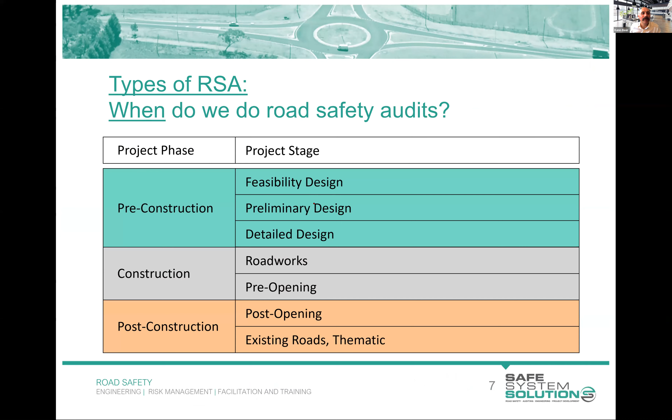Okay, so those were the sort of types of audits you can do. And in every one of those audits, regardless of whether it's a feasibility, a post-opening, or existing conditions audit, you follow the same 8 steps. The process is the same - it's just the information you're getting, the type, and the amount of detail that's different. So this session, I want to define those 8 steps of a road safety audit. One of the things which has been quite good is that internationally there's general consistency with these 8 steps.

And I'll point you to some further information. So, a road safety audit is a fairly straightforward process, 8 steps. It does take time, it adds value to the project, and it really should be an integral part of that design process for any project of any substance that's going to interact with the road network.

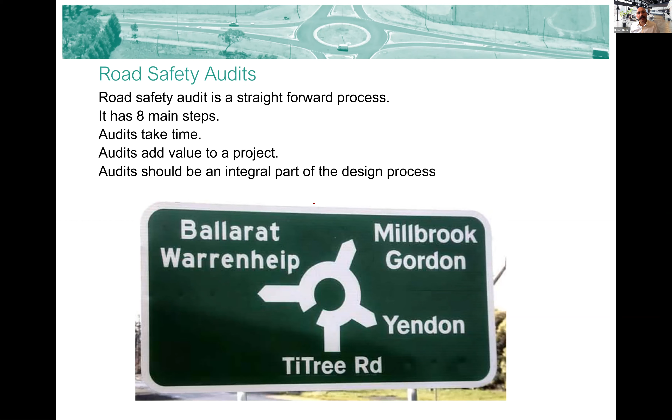Now, just a little question here. Here's a directional sign - green is the directional sign colour, certainly in Australia and New Zealand. There you go, telling you where Ballarat is and Yendon and the like. Anybody see anything slightly odd about that sign? I'll let you think about that for a bit and I'll come back to it. But if you can see something a little odd and be the first one to put that in the chat, I'll give you a prize.

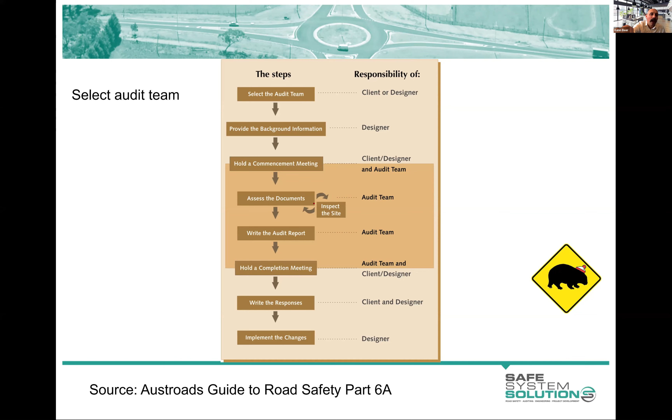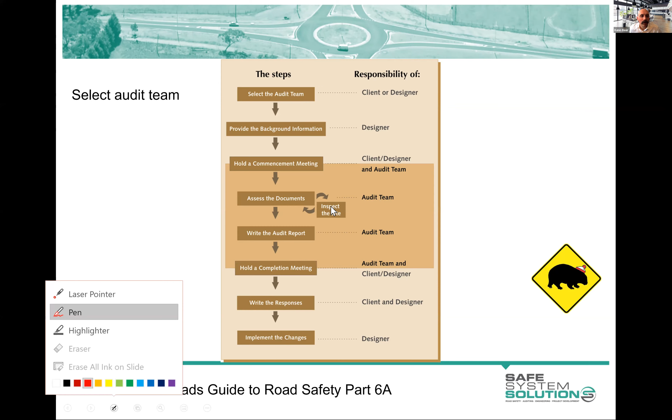But here are the 8 steps in a road safety audit. They are documented in the Austroads Guide to Road Safety Part 6A. I've taken a sheet out of actually one of the old ones, but it's the same process. I'm going to go through each of these steps very briefly with you because it's just a process I want you to remember. First, the audit team is selected, and the responsibility for that rests with the client, the designer. They have absolute ability to request a specific auditor if they want, or more commonly, they ask an appropriately qualified and insured consultancy to do the audit, and the consultancy puts together the appropriate team. But the client could be specific if they want.

The information is provided - the designs, any background information. There is a commencement meeting, however this can be a phone call, could be just an email and brief, especially if it's an auditor that knows the process and it's a project which is fairly well contained within the design. But there's some sort of exchange of discussion and information there. The documents are assessed - you review the designs, you inspect the site during the daytime and the nighttime.

This daytime and nighttime auditing is quite strongly encouraged in the Austroads Guide, you should always do a daytime and nighttime audit. But it's not absolutely mandated, it's really put back to the client, the procurer, or the auditor, to say if they opted to only do it during the daytime.

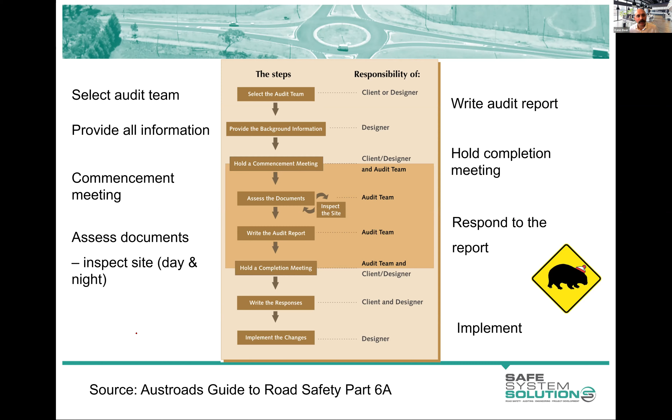In most jurisdictions, you're required to have a team of auditors, and the team has to be led by a senior road safety auditor or somebody with that experience. Most jurisdictions in Australia have a register of road safety auditors, and I'll talk you through how to get on those registers in the last module.

You enter as a road safety auditor, or a Level 1 in some jurisdictions. That's an acknowledgement that we can't expect people to start their auditing career as amazing auditors. They get mentoring and more experience with senior auditors and lead auditors, then graduate up to the position of senior auditor after proving their experience.

A few tips here: you really want to use a team, and the current Austroads guide highly encourages teams. But there's a bit of a get-out, saying on a low-risk, small project, a one-person audit team could be acceptable. The next Austroads guide, if it gets through the board, will be stronger on this and basically say it's got to be a team.

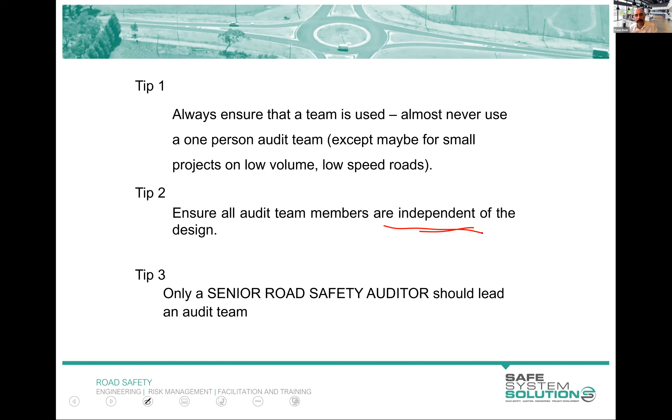Make sure everybody is independent - we covered that pretty well last time. And really, only a senior auditor should be leading that team. It would be wonderful if you have a nice broad range of people in the team - different road safety experience, professions, ages, empathy with different road users, males and females.

That would be ideal. Here's an interesting audit team I put together quite a while back - three of us who were all ex-VicRoads, about the same age, all engineers, but basically all looking at the road the same way. So in the team, we decided to pull in Wendy, who was older than us, female, not an engineer, and came at it with a very different set of eyes. It was nice to have that rounded perspective, somebody asking different questions and pointing out different things.

The practical reality is that putting a team like this together is more challenging in terms of time and resource requirements. So you often don't have that luxury - you're in a consultancy or a different team, and you just put together what you can and get it done. But that's a nice ideal if you can manage it.

The other thing I haven't mentioned yet, though it was alluded to in a previous slide, is that you can have others involved in the audit. They still have to be independent - you can't have the project team or the designer in there. Wendy is actually a road safety auditor, but we could have the principal of the local school or the local police officer be part of the audit team. They're probably not going to add technical input, but they'll give insights into how these areas are used, local knowledge, different bits and pieces - that can be really rich information for an audit team.

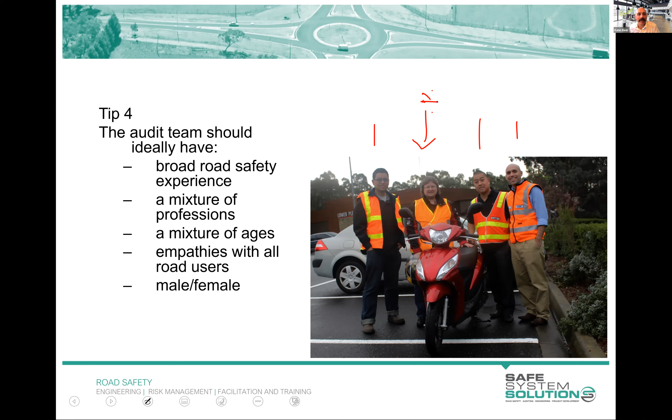What are some other things? Headlight impacts, glare, and the like. Sometimes road alignments change, and the headlights that were fine before now shine straight at people at a certain height, blinding them for a whole section. So as an auditor, you might recommend different screens or alterations from that perspective.

Now, who came up with some answers, and who was quickest? Got lots of good answers there, Ken. Looks like Julian was quickest on that one, closely followed by Tim. Julian must have fast internet going on there.

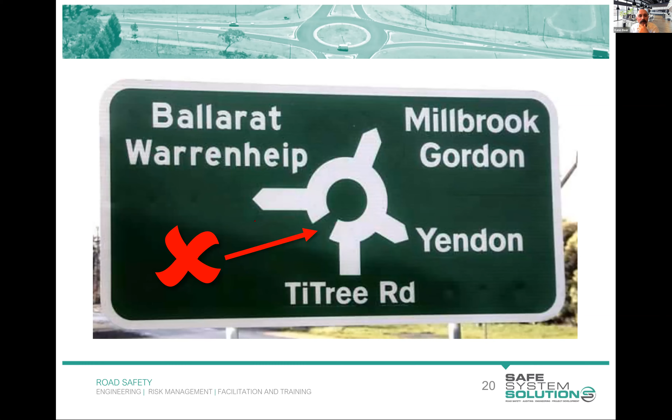And that's based on the context. So we do think about context when we audit. It's not to say that an American tourist will never approach this one, but it's less likely. In order to get to it, they probably traveled through lots of roundabouts, and it's a slightly different scenario. So those tourist areas, we need to start thinking about things a little bit differently. People do drive on the wrong side of the road, and Tim's down there in an area with lots of tourists, so he's probably very aware of ways that you've got to think about how your infrastructure and signage goes to ensure tourists can do the best job they possibly can.

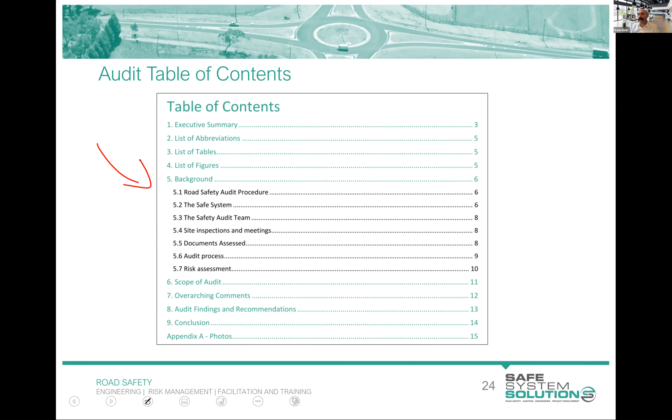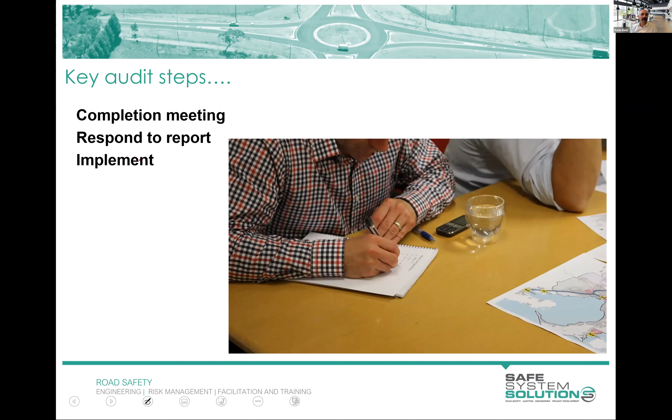Completion meeting, responding to the audit and implementing. As a project manager, you'll get that report. Everybody should be keeping file copies of it for the reasons I just mentioned and other probable reasons. You've got to respond to that as a project manager or designer in writing to all the recommendations.

Too often we see audits being done because somebody told them they had to do an audit. And so they do an audit and they just put it in a drawer. They don't do anything with it.

Your response as a project manager or designer may become public. Just remember that audits do get made public for different reasons, so it's good practice to pass that over to the audit team as well. And remember, if you're the project manager or those receiving the audit report, it's done to help your project, but it is your project, and it's your decision about what happens.

We have a question, Ken. What liability exists with auditors if there is a fatality at the audited site?

Good question. I do a tiny little presentation on legal liability at the end, so I'll just put a pin in that one, because there's a bit of complexity to it. But yes, you're providing advice and incidents could happen, so there is a chance of that. I'll explain more in module 6, after you've done your audit report.

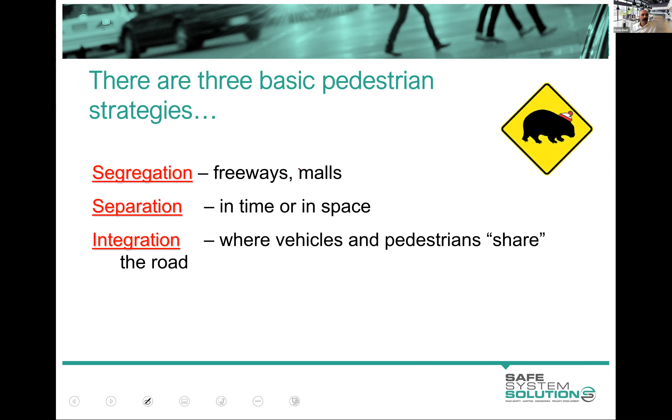There are 3 basic strategies for pedestrian safety: segregation, separation, and integration. Segregation is really where you say this group over there and this group over here - cars on these freeways, pedestrians not on this bit.

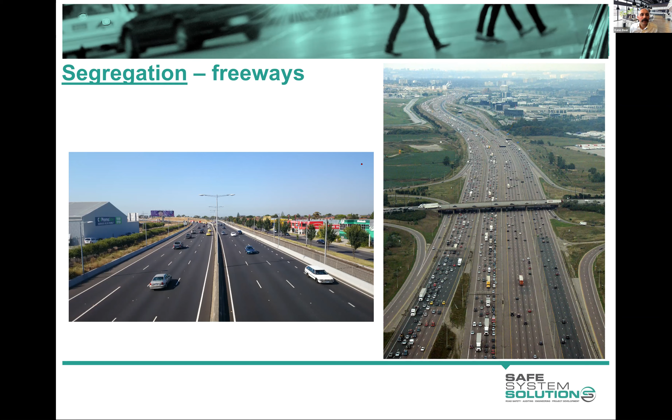Segregation also works where you have a pedestrian mall - that's only for pedestrians. That's the segregation, a fairly obvious one.

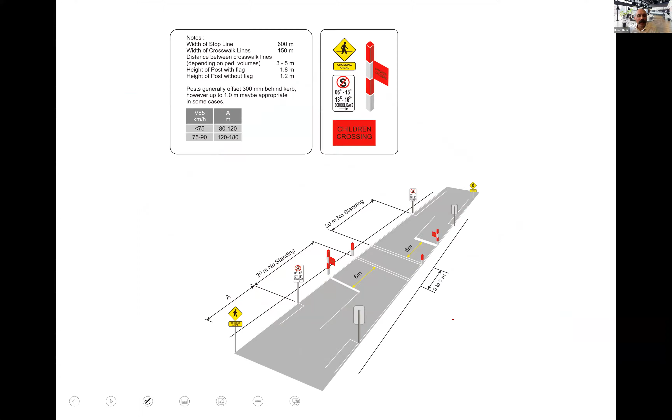Separation can be done in time, where a bit of road gets used at one time by pedestrians and at another time by vehicles, trying to keep those two separated - as are children's crossings and the like, and crossings where you might be going in all sorts of directions, crossing that way or that way.

Prize if you can tell me the official name for that type of crossing. Yeah, it's not a scramble crossing - that's the more colloquial term. It's a little bit of a hard one. Oh, Catherine's got it - it's a Barnes dance. Must be a lady or a man called Barnes that came up with the idea, called a Barnes dance.

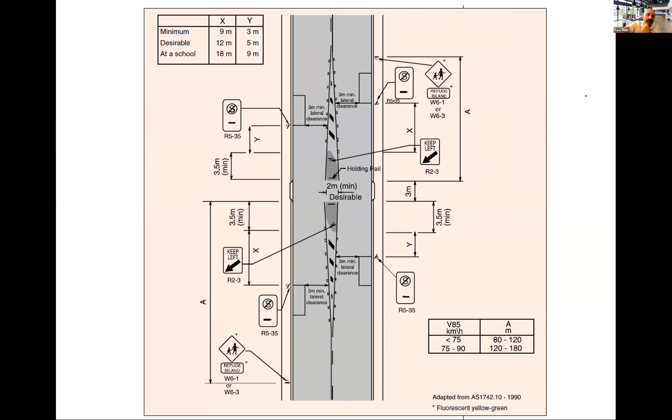Separation in space as well - refuge islands, footpaths, those sorts of things - we're separating from road users when they're in the general vicinity. As auditors, we want to ensure we're catering for enough separation. The classic question: how big do you make your refuge island? Yes, there are standards and guidelines you can follow and check.

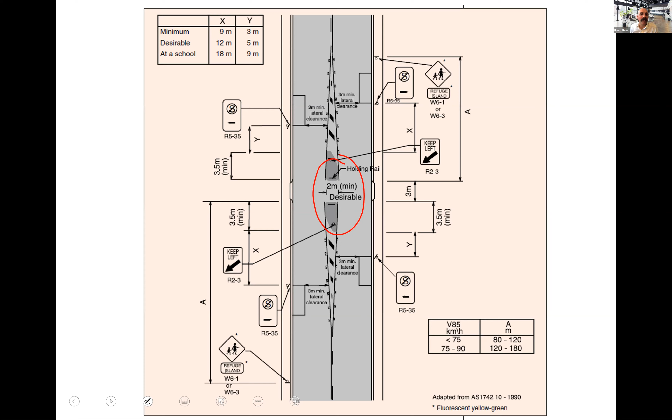But as an auditor, I like to have some rules of thumb in mind, not to be overly influenced by that. Is the area wide enough that a father or mother pushing a pram doesn't have to decide whether their child or themselves stands in live traffic? That's a pretty good rule of thumb. Some people use the bicycle test - if you're on your bike pausing there, you don't have a wheel hanging out, so you get a feel for it. But you'd also want to think about what your road users are, how many there are going to be, whether there are lots of mobility devices using this, and whether it's big enough.

Separation, where we sort of almost get to segregation, is where we have pedestrian overpasses. One thing I discovered in my road safety time is that these are wonderful devices if they're used. But we see so many of them go in and they're just not used by road users. They're big, expensive, elaborate things.

As a road safety auditor, you're thinking about pedestrians and their desire lines. That's a term we always use as auditors with pedestrians. You could say the facility is not on the pedestrian desire line, or the pedestrian desire line is here and it's going to cause these issues. The desire line is basically a straight line from where they are to their destination, origin to destination. Pedestrians are the road user least willing to go off their desire line.

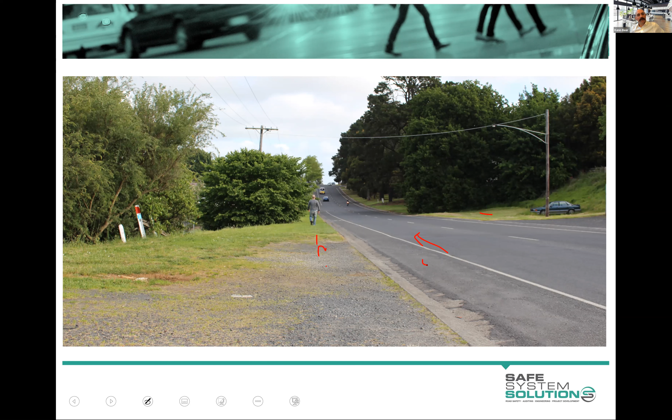There are a couple though. One situation I am quite a fan of a pedestrian fence is outside of a pub or a nightclub, that sort of scenario. And the reason for that is I've done two coronial investigation reports on pedestrian fatalities involving people coming out of drinking establishments and onto the road.

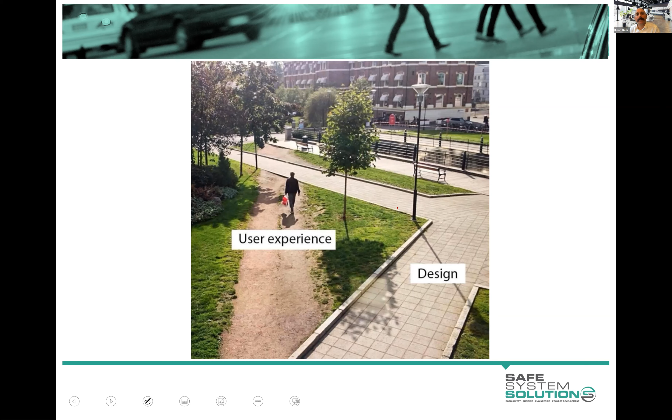Rather than going, oh, here and here, and that will try to make them go where we want. Lots of examples of that sort of stuff where people want to go this way, that's what they do. And that one, there's not safety issues really associated with it, but something to bear in mind. Just a few pictures of desire lines.

At that sort of high level, early feasibility audit, the planning style road safety audit, you can think about cutting off populations from where they want to go. And we do see it in a lot of countries in the world, the big fast motorway goes through, separates a community from their shopping area, or they're crossing the road. We've got to provide those facilities and think about that as we go about designing and auditing, of course.

Okay, let's just have a look at any questions here. Okay, I can see one's coming from Julian.

Would it not be implementing pedestrian safety for the safety of the majority of people? Without them, wouldn't a large portion of people walk on the outside of the crossing? Yeah, okay, that's a good point. So, if you can improve the safety of the bulk by creating a safety issue or opening up a safety issue for a smaller number, do you do it?

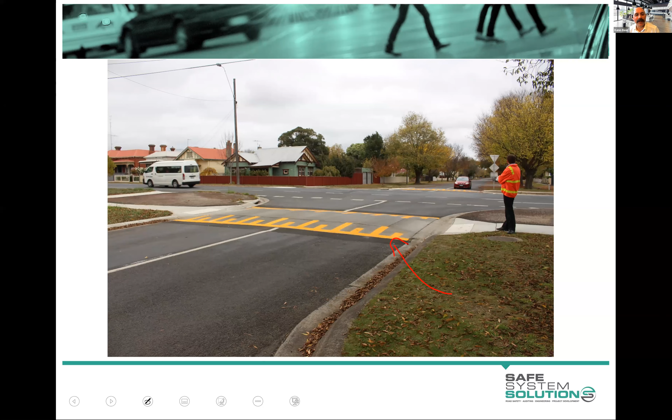They said, well, that's why we used yellow markings to try to differentiate it from a zebra crossing, a pedestrian crossing. We're playing in a little sort of traffic engineering land here if we think the community is sort of astute enough to understand that subtlety.

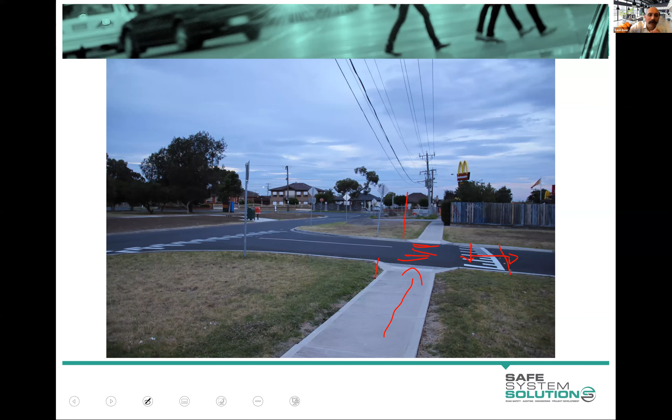This one I like, and it's, I suppose, an example of where you can still get that threshold treatment, but you're lessening the look of absolute priority, aren't you? I mean, pedestrian to walk up to here, same road surface color, stretches through. Maybe the platform could be moved back a little bit just to really clearly show if you're hitting a road. Or you go the other way around, obviously, and you actually make this a pedestrian crossing, sign it, mark it, really make it clear that way. And airports - airports are a

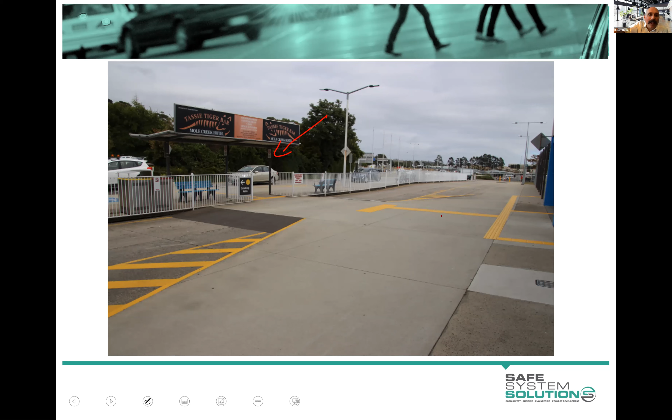Absolute goldmine of road safety audit training material. I think it's because the federal government looks after it. And anyway, this one, walk out of Launceston Airport here. You're going to get picked up there. You've had a great flight. You're excited, going visiting friends or whatever, and you walk out here. And well, who's got priority here? We've got taxis there to use this as their quick run in to pick up passengers. Again, it's just confusion of priority. I mean, taxis technically have priority there, but geez, you wouldn't quite know it.

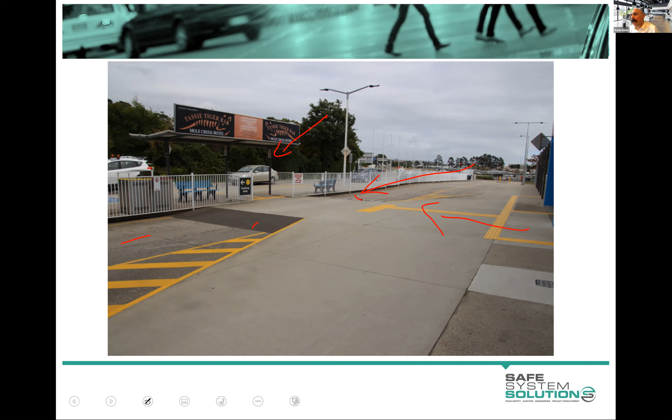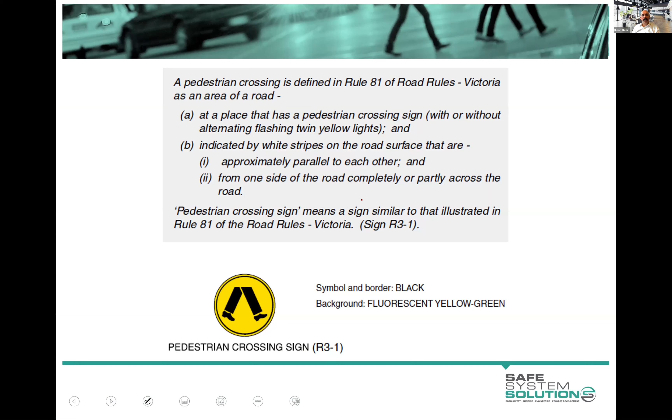The one thing that I think is lessening their risk significantly is the raised portion here. So that's a bonus, but that could be easily clarified. And again, we've got people with good intentions saying, 'Hey, cross here,' but let's clear that priority up. And in Australia, we use very specific pedestrian crossing signage, and you need to do the line marking as well. So we do our zebra crossing and it's clear pedestrian priority. So there's an example of it.

There we talked about slip lanes and the challenges of those already. And I'll just see if any questions or comments have come in.

There was one a little earlier, Ken, which is about what are your thoughts on shared spaces and paths? Yeah, oh, shared zones? Shared zones. Okay, yeah, shared zones. Yeah, I love shared zones. I think it's great. I think it makes a populated area more livable, easier for active transport.

Yeah, really, they can be wonderful, but you want to design them correctly. And if they're not designed correctly, they can present some challenges.

And funnily enough, the shared zone, shared path terminology, actually quite a few people out there get those confused. They think a shared zone is a shared path and a shared path is a shared area. So a shared path is your pedestrians and cyclists using a path, they share that path. Shared zone is a specific road rule terminology of an area where a vehicle must give way to a pedestrian.

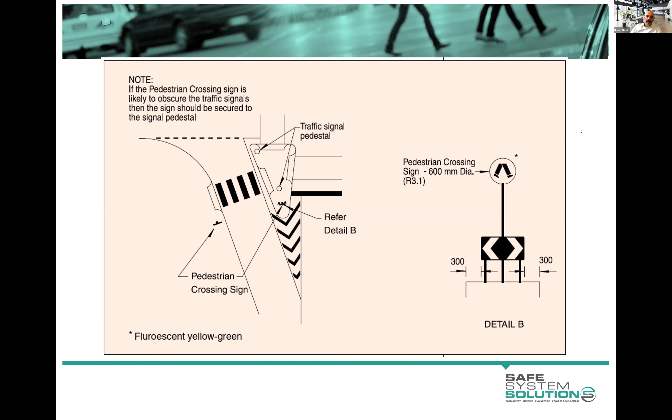Okay, let's keep ticking along here. And then just, how are we signing these things? Again, random areas where you see use of pedestrian crossing ahead signs as ways to try to encourage pedestrians into a certain area, just incorrect signage. It's not high risk, but you can pick some of these things up.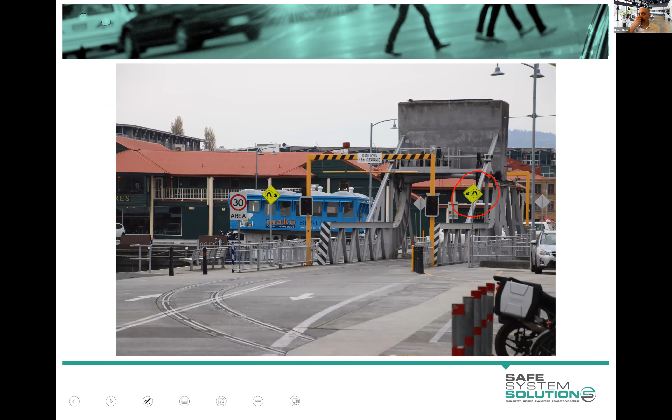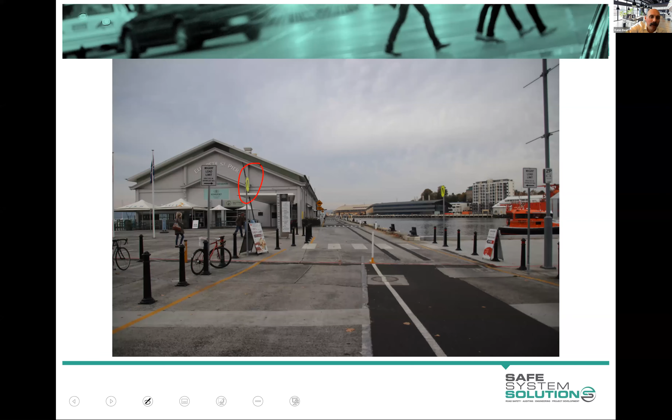This one's a little more high risk, I would say. The pedestrian crossing here is marked, it's signed, but at some point, the installer or somebody has thought that you're meant to face your pedestrian leg signs at the pedestrian, so they know where to walk, rather than for the drivers, so that they know that they have to stop at this location.

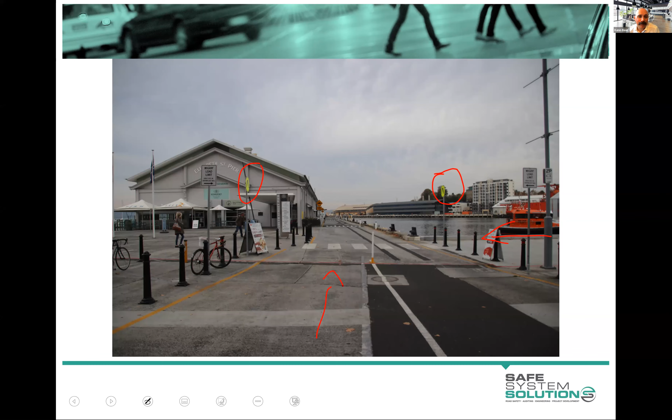Again, this sort of post-opening, these things you'd hope the project manager or others would pick up, but I'm not making these things up. These are just photos you see, you snap, you add to the training.

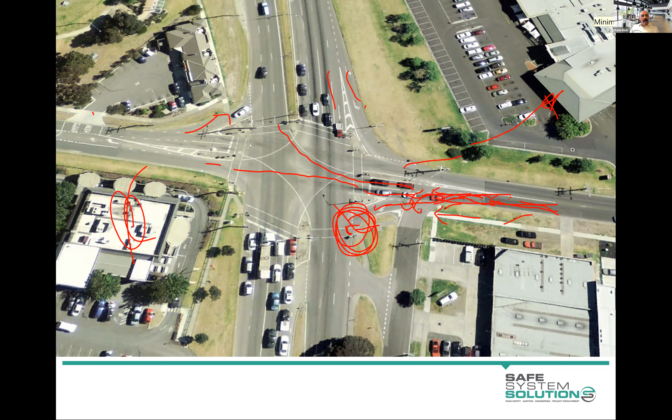If you had time, I think you would have got to that if you'd processed and run through each of those areas and really worked those through, and you would have picked up lots of issues. Your challenge would have been to decide, is the risk enough to warrant getting into my audit? Or is it a tiny bit of risk that'll be there for 100 years and most likely there will be no incident as a result of this. I'm not going to make that audit report have 500 issues for this intersection because I want to hit them up with the big issues that are reasonably part of what's going to present death and serious injury into the future.

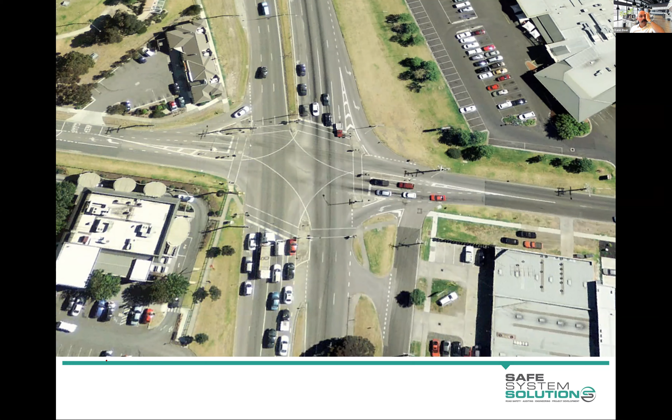So just a couple of little things before we wrap up. It is really great to get out there and audit at times when you know there's going to be altered use of the facility. So end of school if schools are around, or if there's upgrades planned near the local footy ground, and you can get there on a home game to see the way it operates then, that's wonderful. It adds to the richness of your audit. Practical reality again is you just may not be able to do that for one reason or another - your audit has to be done in a week and there's no home game, well, you're not going to see that. Again, you might get some insights from locals if you're not a local yourself, or talk to your client about how it operates.

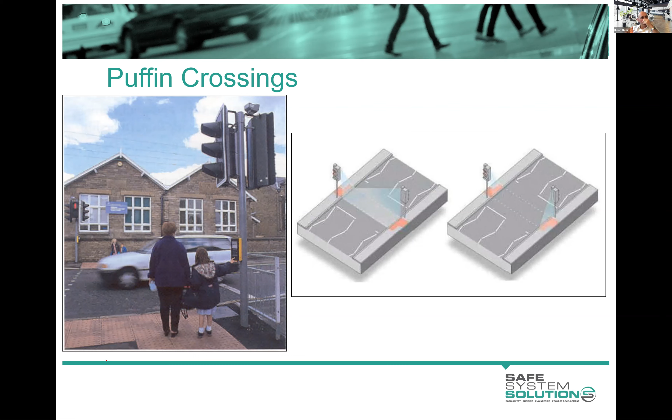And then as you make recommendations as a road safety auditor, you're recommending all sorts of stuff. It's nice to know a bit of what's available out there as treatments for pedestrians. We've talked about a few of them already. At pedestrian operated signals, there are things called puffin crossings - pedestrian user friendly intelligent crossing. That's your radar that basically, when you walk up to the house at night and the lights come on automatically - same technology put into the signals, keeps the lights red if there's movement on the crossing. So that's got a puffin, and you can retrofit them to pedestrian crossings. At some point in the pedestrian crossing game, some traffic engineer back in the day decided to go run with a bird theme, and everybody's stuck with that.

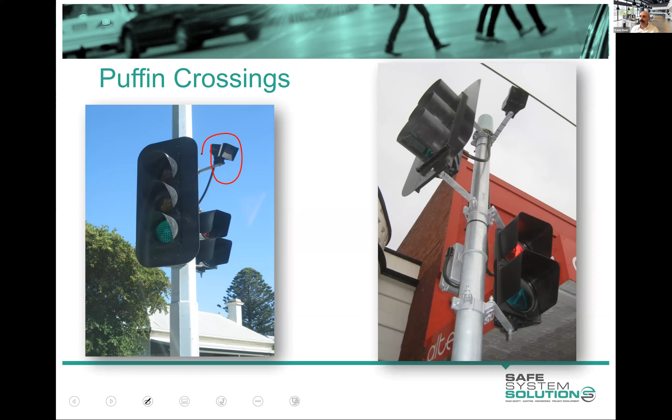Pelican crossing - a pelican crossing is a pedestrian light controlled crossing. So that's the one where the driver sees a red light and pedestrians are crossing, and then it goes to a flashing orange light. That's to give any pedestrians that are straggling time to get off, and then it goes to green.

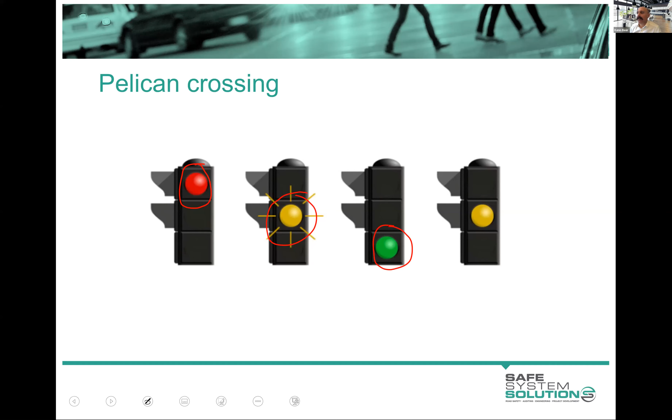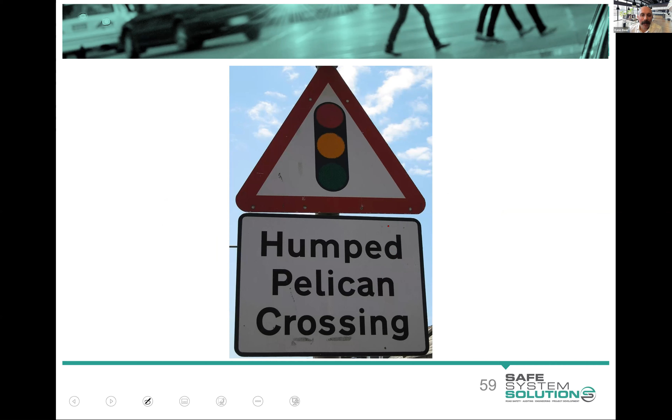Pedestrian light controlled crossing - I saw, I can't even remember what it was, like world's craziest signs or something, and this one was up there in the top 10 of world's craziest signs: humped pelican. I'm like, that makes complete sense to me. I don't understand why that's funny, but I know I do understand why that's funny. But humped pelican crossing makes complete sense.

In fact, a random other bit of legislation around horses - it is illegal to ride a horse when you're intoxicated, because that's drink driving under the road rules. But interesting to know that it is not illegal to ride an intoxicated horse.

Hey Ken, did you know that a horse's beverage of choice is Chardonnay?

Oh, a little comedy act for a Friday afternoon. Sorry, everyone, I couldn't resist. I'm very pleased with myself. But surely it's illegal to get a horse intoxicated. Adrian says it is illegal to get a horse intoxicated. If it does it itself, though, then it's up to the horse.

All right, that pretty much brings us to an end on the intoxicated horse topic. But I want to tell you something to alleviate some concerns people might have, because I was showing incidents where members of the community would be killed or seriously injured, and designers and auditors with alterations could have meant that doesn't happen. So it's a big responsibility, isn't it?

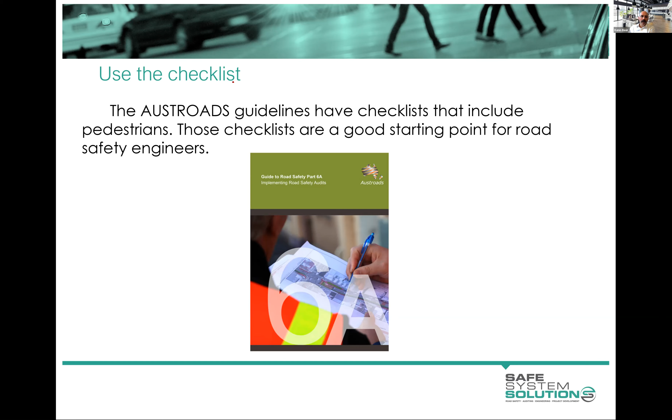Final little quiz just to round it out, not a critical question, but let's pop up that quiz, Emma, if you can find it. Sorry, Will's making me laugh. All right, which of the following is not one of the 3 infrastructure strategies for pedestrian safety, going all the way back to the start of the course? Is prevention, segregation, separation, or integration one of the strategies? We'll give you another 10 seconds because it's a quick and easy one.

5, 4, 3, 2, 1, and let's end that poll. And prevention is correct - that's not one of the infrastructure strategies. We want to prevent pedestrian trauma, but we do it through either segregation, separation, or integration as our main strategies. Thank you very much, well done everybody on that one.